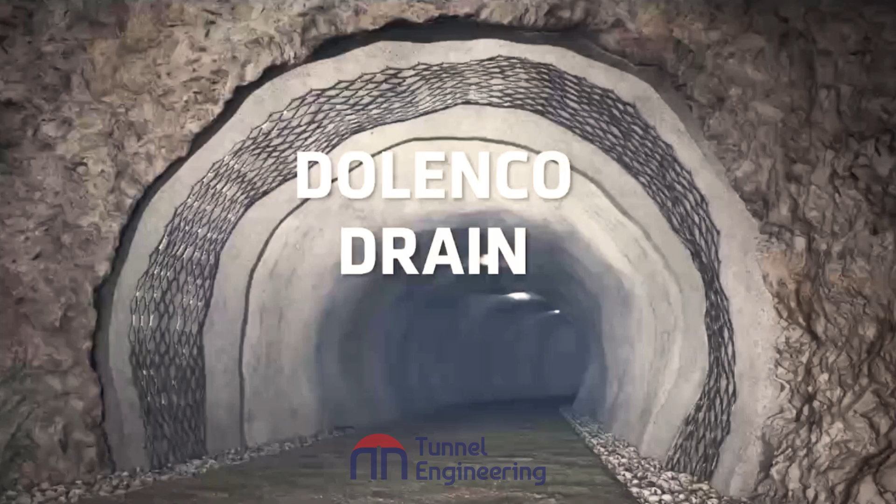Welcome to this talk about groundwater, hydrostatic pressure, and drainage, and how to manage these things when we are talking about underground structures.

When we're doing these incredible feats, digging out a tunnel, meaning removing a huge part of a mountain, for example, and just leaving it void so we can pass through it, there's a number of issues with that, because the mountain is many years old and has its own dynamics. The first we think about is the soil dynamics of doing this, which has a tremendous influence on the structure. We also have the dynamics of the water inside that structure. When we open this up, we apply a number of lining designs to try to use this excavation safely.

We have put this into three times of influence: the excavation, then the construction, and then after. The excavation is very critical because we have no safety at all by excavating, so it's very tedious and dangerous work. During construction, we start with making a primary liner to make sure we can actually go in and work there. Then over the lifetime of the structure, we also have the dynamics of the surrounding soil and rock, whatever it is made of.

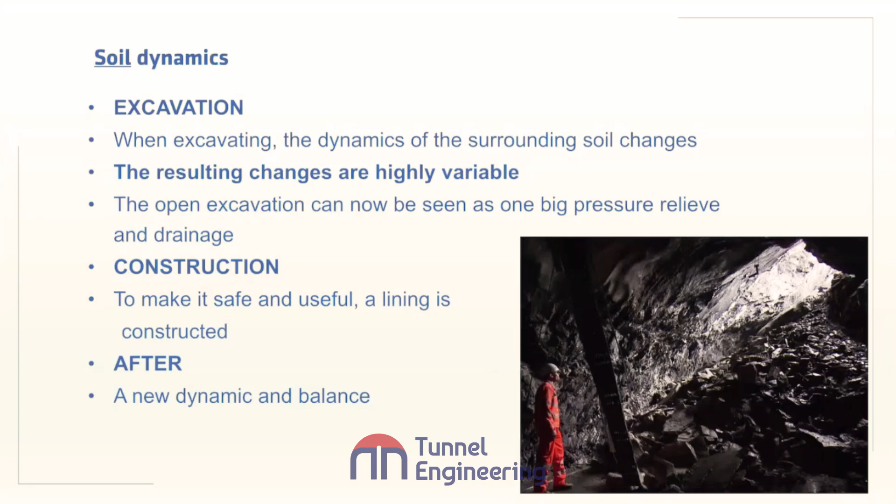The danger here is that this dynamic changes when you excavate, and it can also change over the lifetime of the structure just by settling. The same goes for the water - as soon as we excavate, the water can pour in because there's water nearby. There's a period during excavation and construction where the incoming water lessens, and then the surrounding water starts accumulating again and tries to find a way out during construction. This is where we start having problems with the construction of that specific lining we chose - working with that design is the critical point.

So we have all the aspects covered of what could come and what might be when we do the actual excavation. After we finalize this lining, we have to make it function over the lifetime of the structure. The fewer problems we have over that time, the more optimal the rate of return on investment and the life cycle costs of the structure. Just one closure can be a very expensive feat.

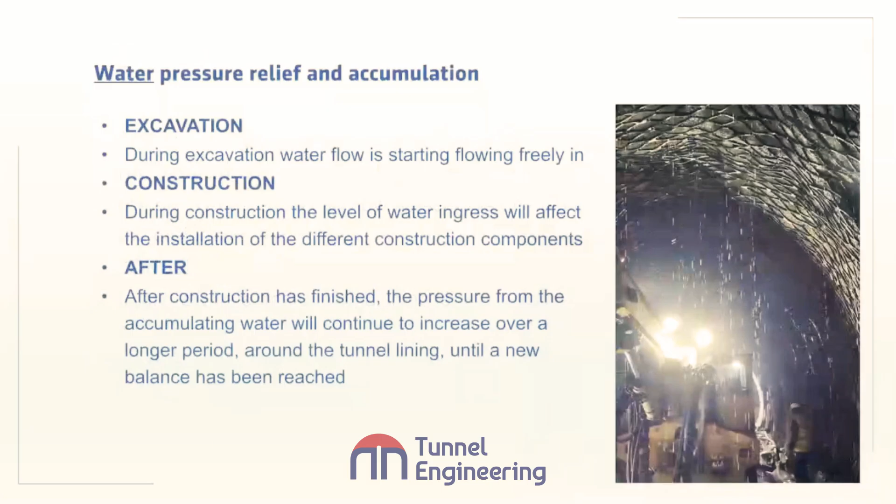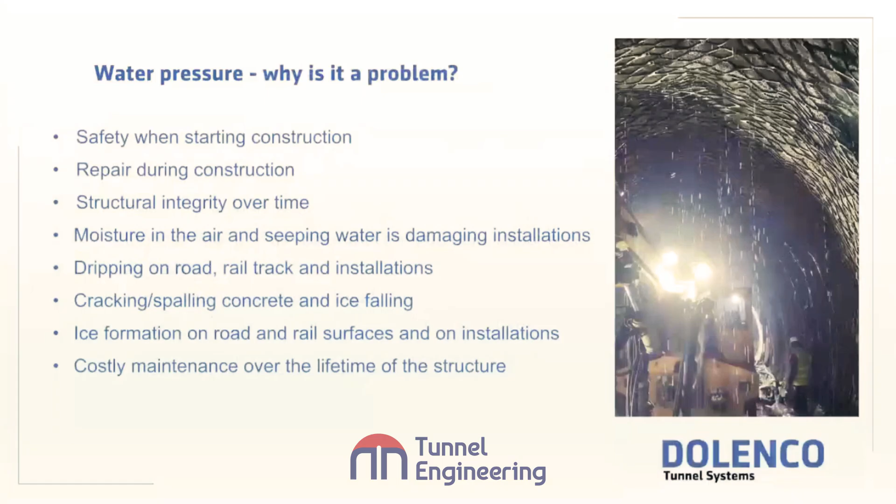These are the critical parts, and what we're looking at is the water and why this is a problem. You all know about these issues because you work with them daily, and it's the nuances it makes when you are making your liner. Water comes in, you may have to repair even during construction. Over the lifetime of the structure you have ice, water coming in, spalling, rails, installations, and so on - these are all very costly feats.

So today we're trying to counter these from three different principles: we try to block it, divert it, or just accept it. These approaches use different tools. For blocking, you can grout it or waterproof it. For diverting, you use line drains and other remedies. Or you just accept that it's seeping, put panels up in front of the seeping, and then you have all the long-term repair issues like injection, concrete repairs, replacing installations, refurbishment, and so on.

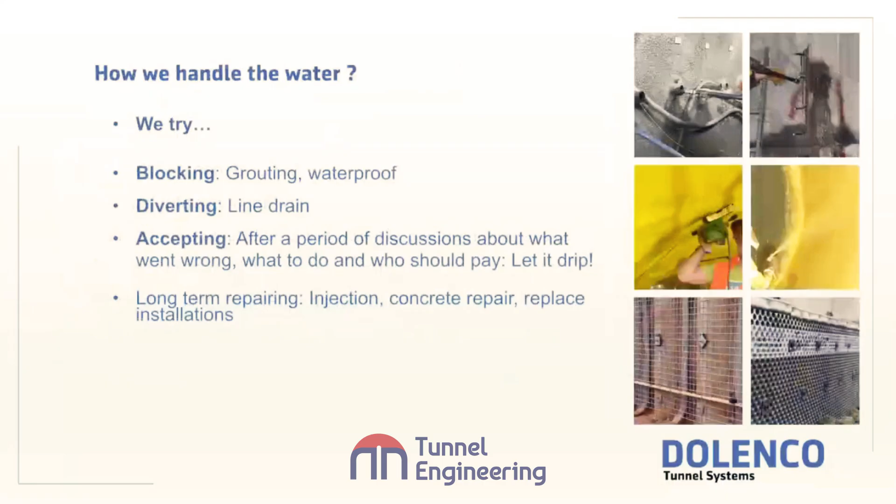Also, we have the design components, the concrete. We can also play a little bit around with these parts, where we can have the concrete fast setting. You can design the concrete with different additives for cracking, or choose to use more concrete. You can use stabilizers like steel girders, anchors, wire meshes.

And for the drainage, you also have different options: dimple sheets, geotextiles, hoses, and so on. So there's a number of parts there as well.

Then finally, we have the waterproofing part, which starts with the grouting, and then we have the different membranes - spray membranes, sheet membranes. You can add fibers to your concrete. You can also use crystalline waterproofing, and you can do the injection, post-injection for the waterproofing.

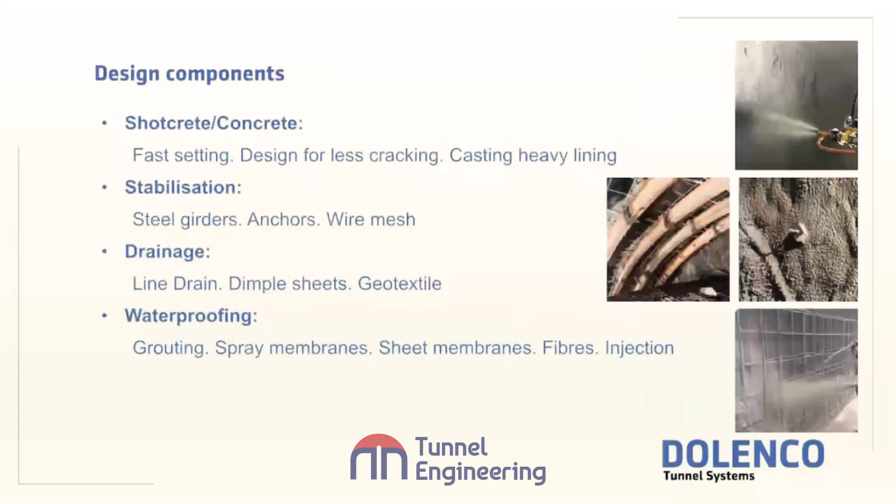All these solutions have one problem in common, and that is that you really never get rid of the hydrostatic pressure, which is the main problem. That's what we have been looking at with our more than 25 years of experience with waterproofing. We basically looked into it and said, okay, if we can manage that hydrostatic pressure, then we can solve a lot of issues in the structure, and maybe even give a longer lifetime, or lower life cycle costs.

And this is how we actually, from this point of view, developed the Dolenco drain for tunnels and other underground structures. What is specific about it is that it will permanently prevent water pressure. And if you take anything with you from here today, it is that - that is the main feature of doing this solution as part of the lining, permanently preventing water pressure.

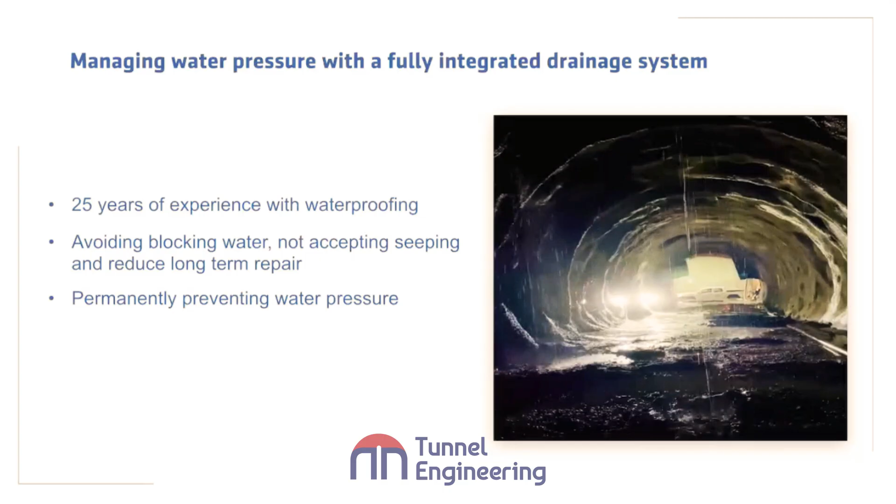As you can see here to the right, this is some of the conditions that we are working with, and which we have also solved with very little remedies, if this is possible.

Before talking more about the specifics, I'd like to give you an illustration with a small video here about the principle of the Dolenco drain. And before I start the video, it's like what you see here.

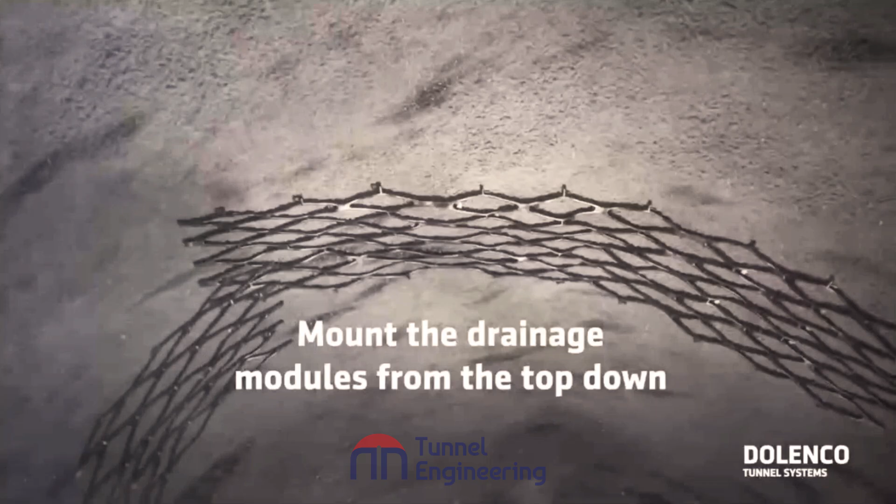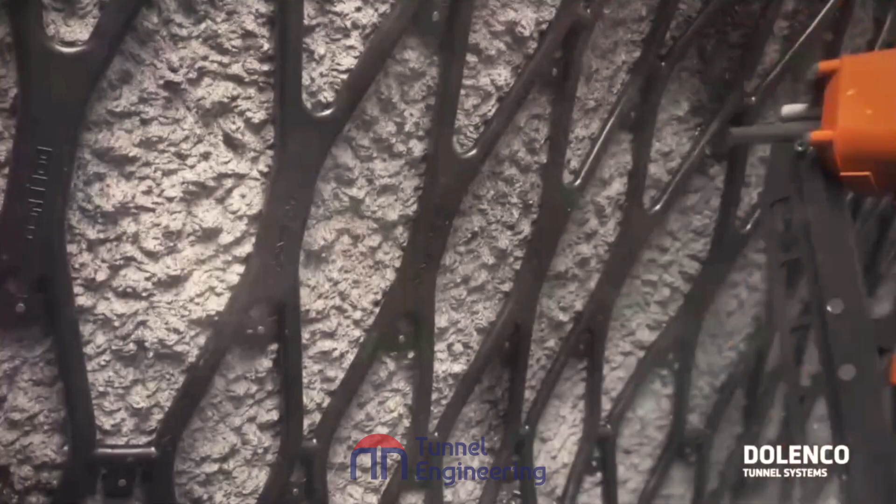As you see here, it's fully embedded into the concrete. You start mounting the modules from the top, and you can see it's a standard module size, overlapping horizontally and vertically, so water can actually disperse sideways and vertically. And at the bottom, some kind of detail for alleviating the water.

So as you saw in the video, it's a module-based system, and these half pipes, you can see them very well embedded in the picture there, down to the left. So it's a very slim structure that you can do, and this of course has some advantages. The module itself is about 1 square meter - that's 80 by 120 centimeters, and only 14 millimeters thick. This, of course, is the advantage of being able to make such a slim structure with a complete drainage inside.

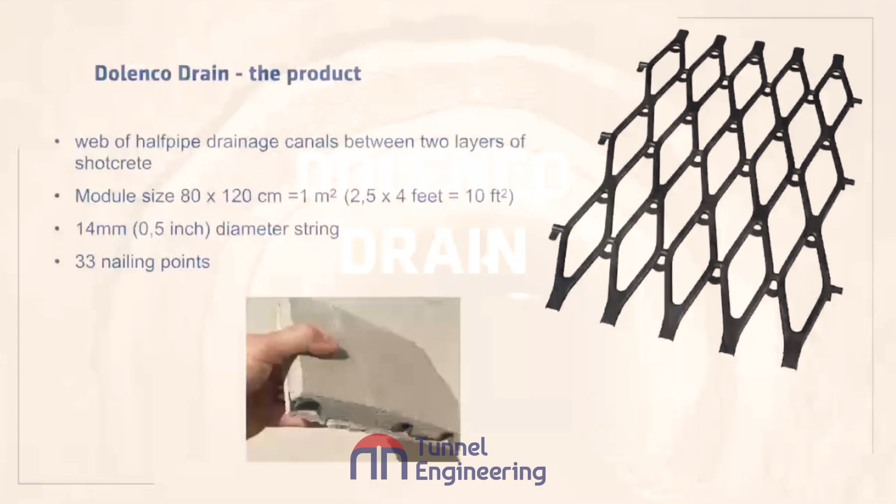More schematically, you can see here the mounting together, and this is also something we can send to you after. To the top left, you see the vertical connection, and you basically just overlap the strings, so the water can go from one module to the next. Below that, you see the horizontal connection, which makes sure that the water not only goes from one string to another, but also from one module to another.

And in those two joints, there's a lot of flexibility built in because of the unevenness of the surface. It's very common that there's an unevenness of the surface, and they have been designed for this purpose. Then there's a designated number of nailing points shown to the right.

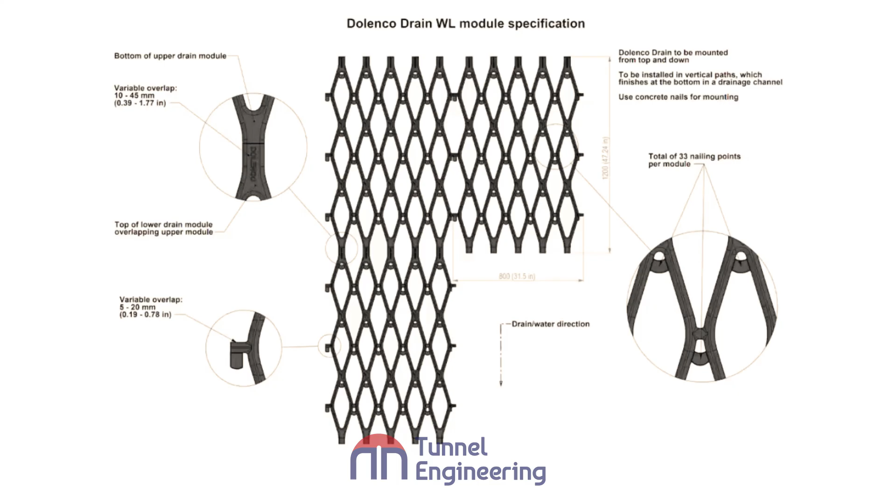So what do you get when you put the Dolenco Drain into the structure? As you can see in the picture, it's covered with a shotcrete layer of about 50 to 100 millimeters and fully embedded, so the primary and secondary concrete now form a permanent lining. This gives you a very strong drainage concept inside, and it can take up to 8 cubic meters of water per linear meter of wall per hour. This is a very high volume of water.

If you have this type of water ingress, you'd have to do something before putting on the second shotcrete layer, because it simply won't be able to adhere to the concrete. Since it's embedded inside the concrete, it doesn't go away - it's a permanent solution. The material is also made to be 100% recyclable.

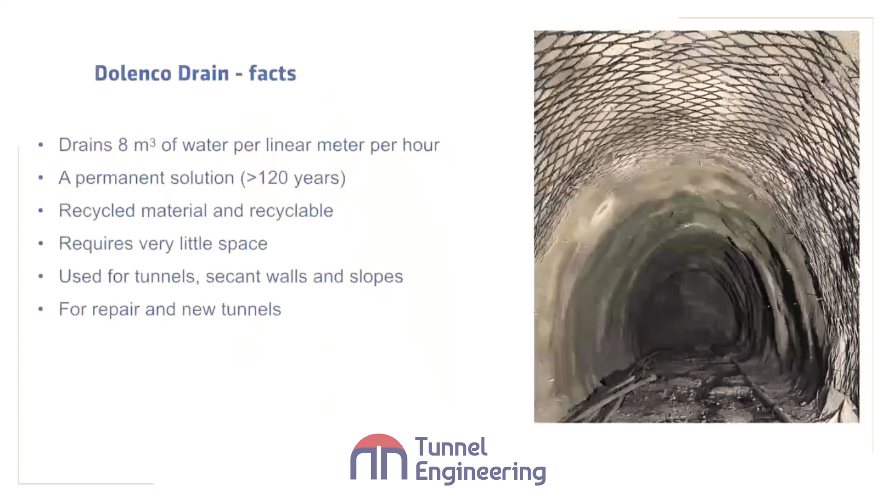Besides tunneling projects, you can also use Dolenco Drain on other structures like secant pile walls, slopes, and other underground structures. And of course, it can be used on both existing and new tunnels. There'll be some examples of this later as well.

So as I mentioned before, the main focus is to permanently prevent water pressure. This also gives you some advantages during construction. For example, if you're using a spray membrane, often we have water accumulating behind the spray membrane before it hardens. When you have installed the Dolenco Drain behind that, it will receive the water before it reaches the spray membrane. So the spray membrane has the opportunity to harden properly and be fully functional. At the same time, you also eliminate or minimize the need for injection during construction.

So let me show you a small video of how it is actually mounted.

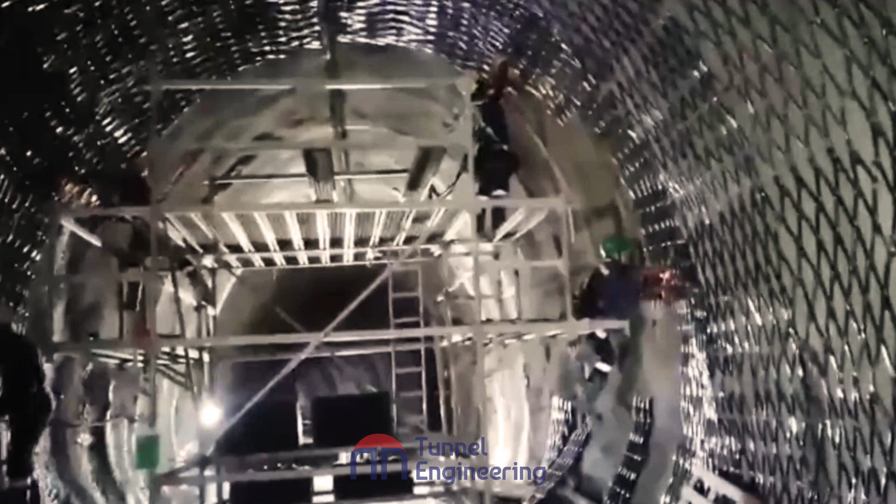Here you see the mounting from a scaffold. It can also be done from a scissor lift. And this is from a road tunnel in Colombia.

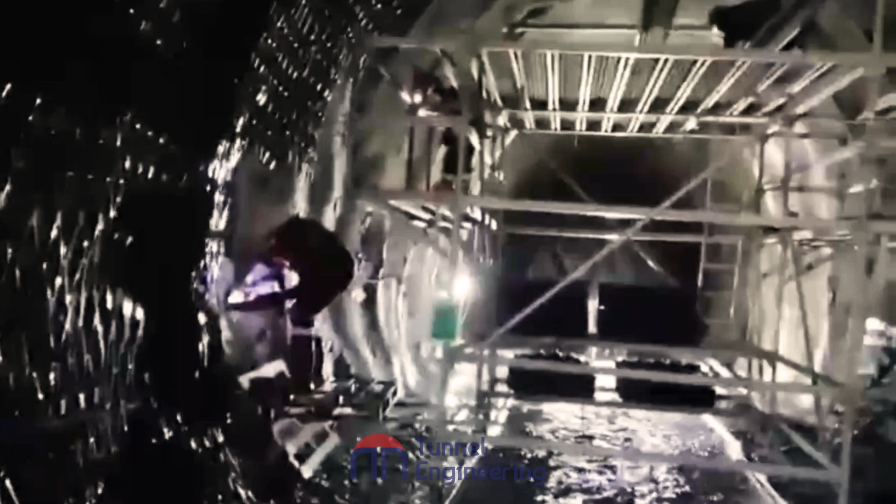Now, as I mentioned, this is a very slim structure. As you can see in the picture, when you've mounted the Dolenco drain onto the wall surface and add the next layer, you get adhesion between the layers. This area is 70% of the surface where you have full adhesion between the two concretes. This is how you make it into a monolithic structure.

So in this case, you will probably be able to calculate less concrete on the secondary lining, because both the primary and secondary linings are now permanent linings.

We tried to compare different situations in hard rock and soft rock tunnels, and we looked at three factors: direct cost, time, and because of that, the derived carbon footprint. In all three factors, we saw a significant reduction in cost, time, and CO2. This is partly because of the reduced concrete use.

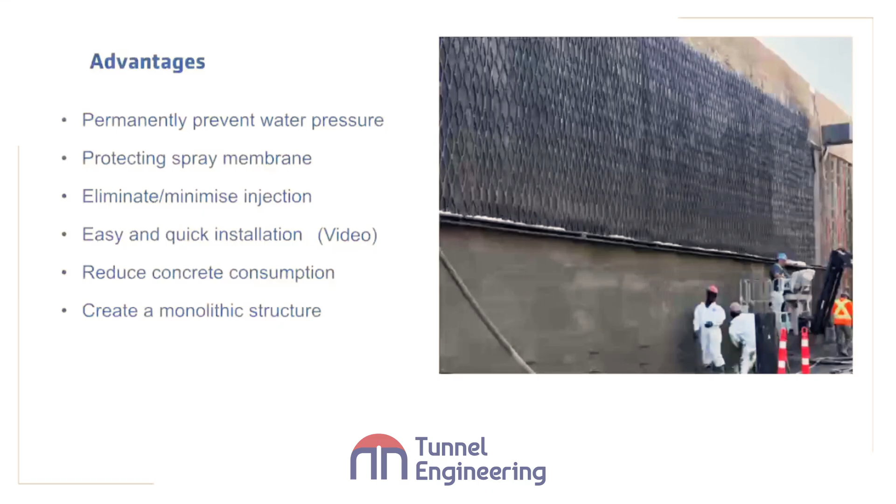It's also because of the fast way of working with Dolenco drain - it's a very lightweight solution. As you can see here on the right, this is a picture from a tunnel in Spain where a scaffold was built over the rail, actually constructed so the train could still run during construction. This illustrates how little space we actually need to mount the Dolenco drain, which is of course the reason it's possible to save time.

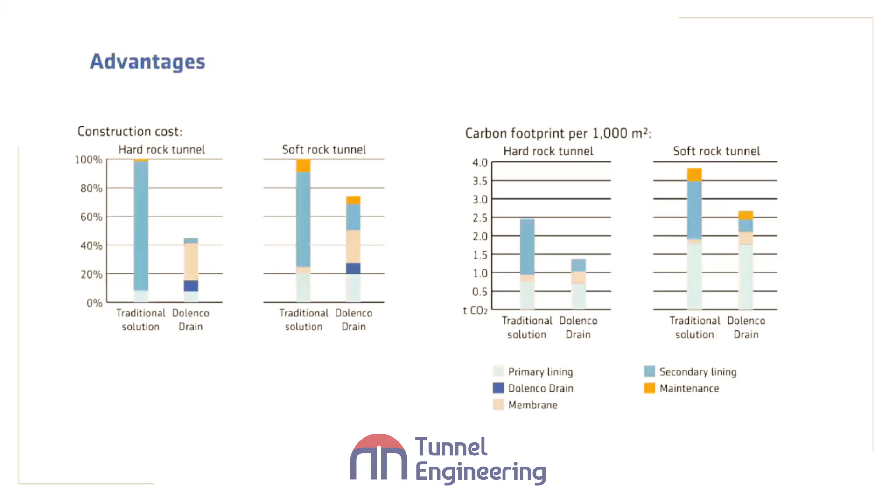And let me show you an example now of a secant pile application.

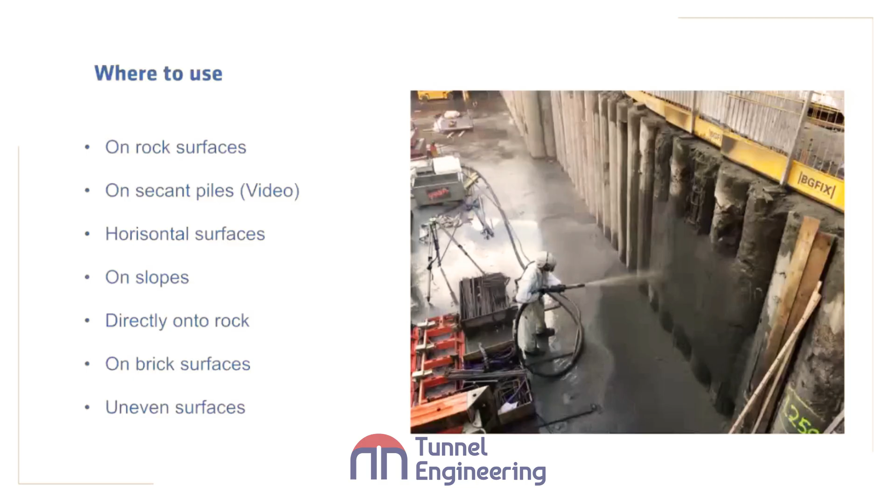Oh. Wait, just a minute.

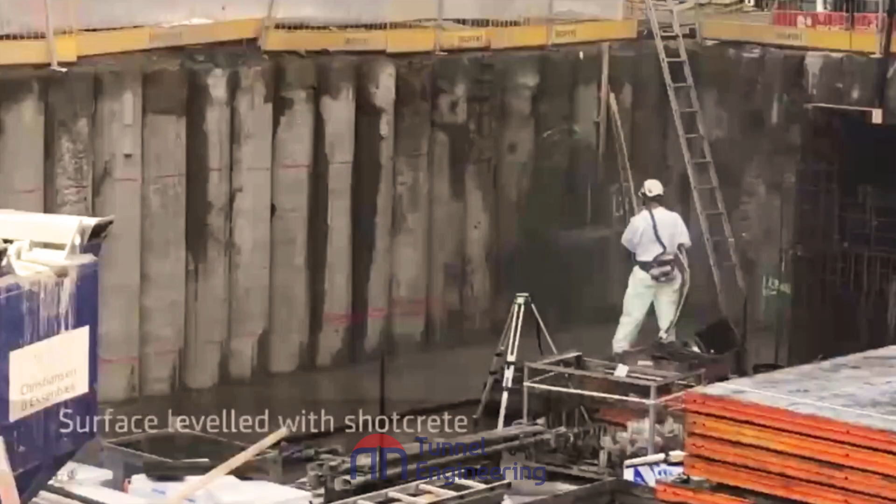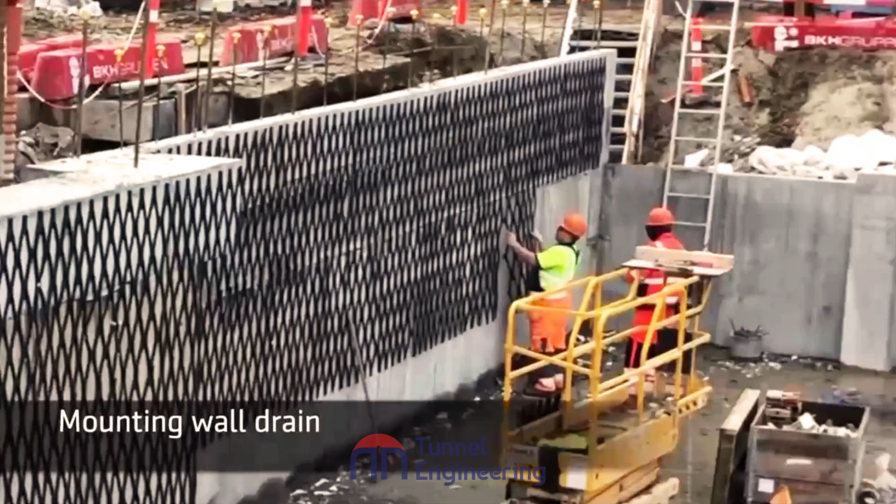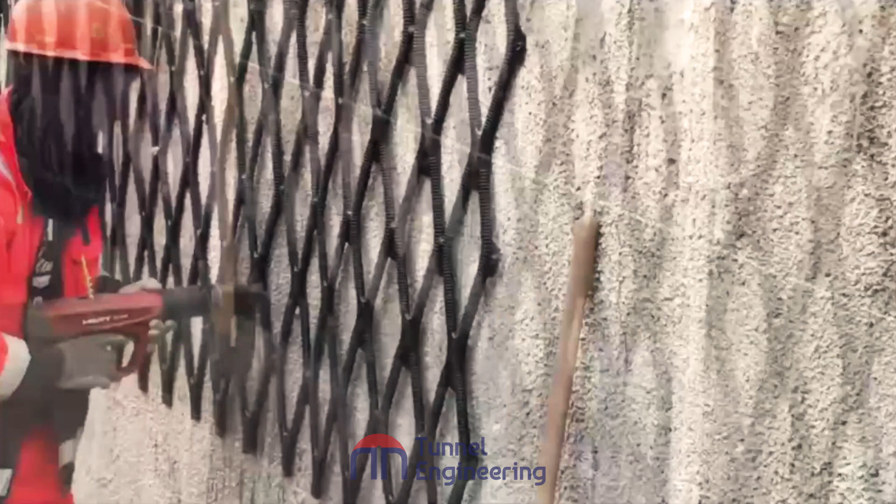What you see here is leveling between the secant piles first, then mounting the Dolenco drain. In this case, it's a combination of wall and floor, where the water simply flows into the wall version and into a pump.

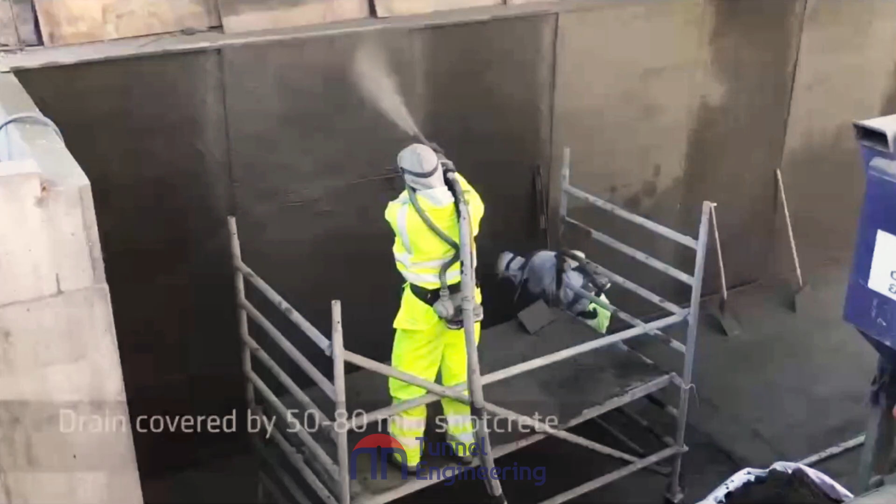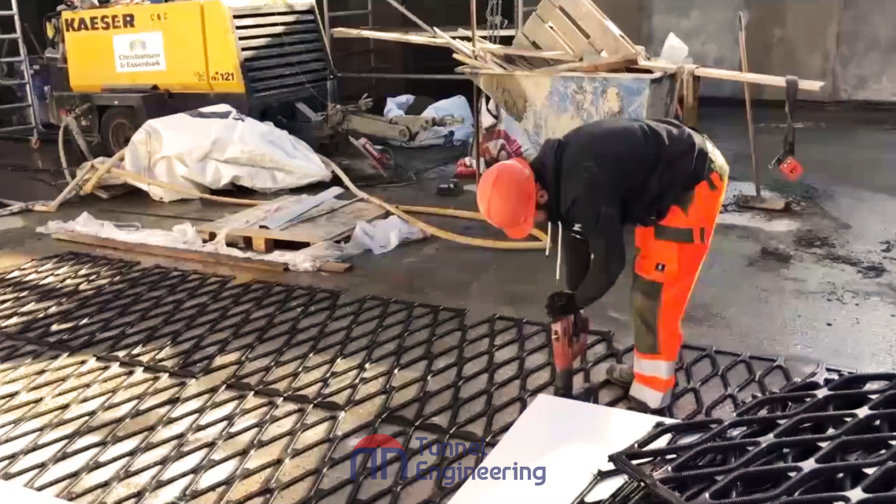It's covered with 50 to 80 millimeter shotcrete. The floor version is a little bit different because it has to take load, so it's a more stiff version.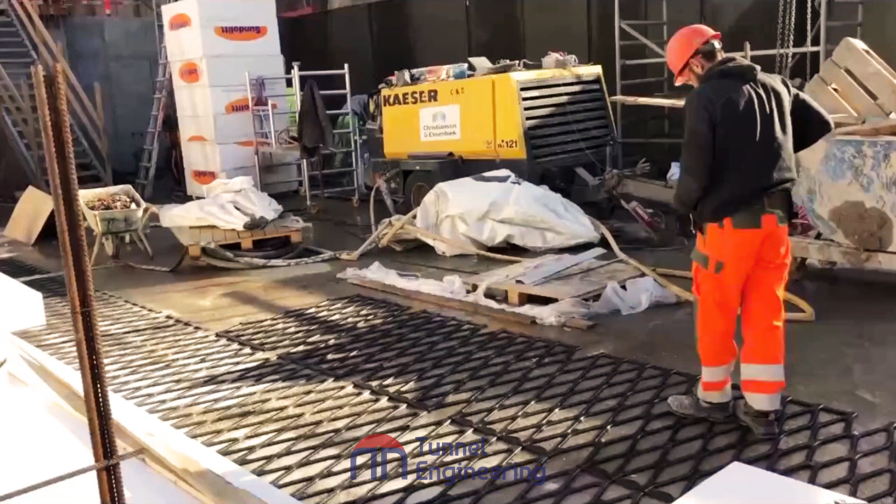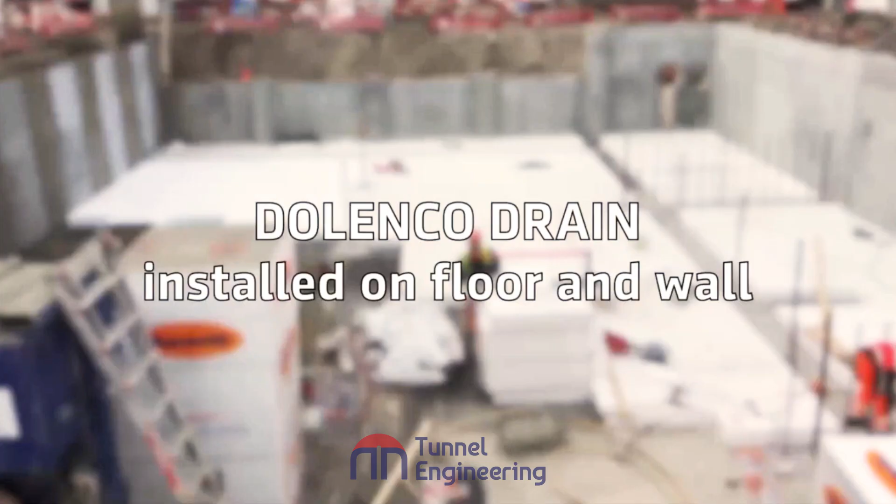As we saw in the video, after having the secant piles, you just fill out between the secant piles, not covering the secant pile with a lot of concrete, just to level it out. It has to be wavy so that the modules can be mounted onto that surface. It doesn't have to be absolutely smooth or flat.

You just mount the drain onto that, and then you cover with shotcrete over that. Then you can combine with different types of gutter solutions at the base. Here we see the Dolenco gutter drain, our own gutter, which is mounted in. This is specifically for very slim structures - a 65 millimeter wide gutter, which can be used specifically also for repair projects where you don't have too much space to work with.

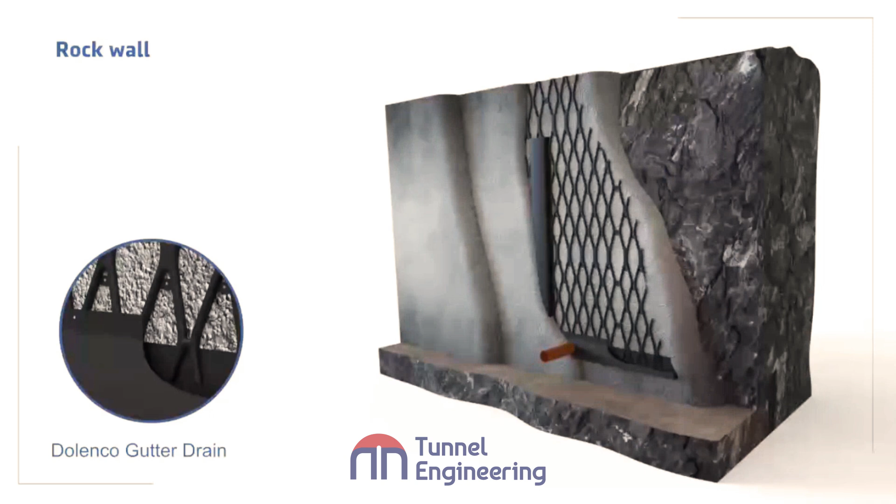On the rock wall, we have the primary shotcrete, the Dolenco drain, and here we'll see it also combined with the vertical line drain. The line drain is for points - if there's a lot of water coming out at a point, it will encapsulate this so we can get the shotcrete to stick to the surface. Then you use the Dolenco drain mounted around that after.

Here it's shown with the 2 layers of shotcrete over Dolenco drain. This is typical that we do this, because if the first layer has some defects, using it in 2 layers will make sure that you have a solid barrier for the water in the secondary layer there.

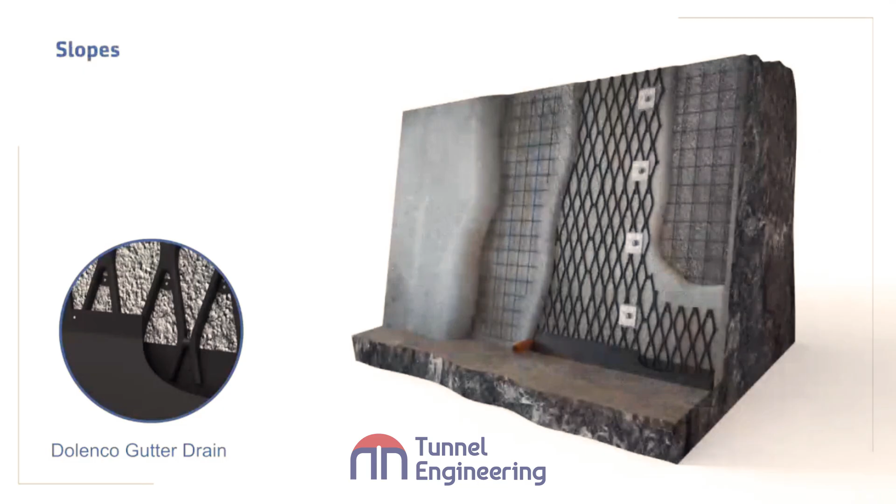Here we have with slopes, where you start with an initial shotcrete layer, then you cast concrete with wire mesh and anchors, and put the Dolenco drain in there. After that, you cast concrete with wire mesh again. And of course, this is instead of using the system where you have a lot of pipes coming through the surface, which has a number of problems for durability over the lifetime of the structure.

In certain conditions, you can use the Dolenco drain straight onto the rock. The issue is, of course, that if the surface is not very smooth, when you shotcrete it, some of the strings will be blocked, but the water will still find a way. The way it's done is to mount it with a wire mesh to hold it onto the surface - you anchor the wire mesh over Dolenco drain, shotcrete it, and the picture to the right is from a project where that made it possible to get the shotcrete to stick to the rock, and it stopped also 80% of the water flow.

The remaining water flow was stopped simply by casting concrete onto this. It makes sense because when you have shotcreted first, and then cast concrete onto that, the water is not trying to get through all that concrete. It will just find a way back into the mesh and alleviate the water pressure that way. Water will always find the easiest way out. So this is a very pragmatic way of working with this situation where you can't get the shotcrete to stick to the rock surface.

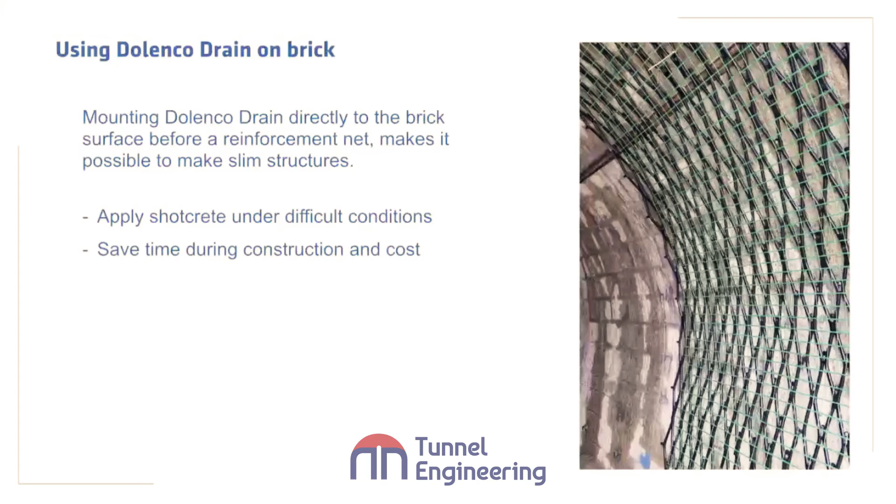On brick surfaces, before you start with the Dolenco drain, you would go and check all the joints and make sure they are repaired and updated. Then you can either mount the Dolenco drain directly onto that, or if it's hard stone, you would put a thin layer of shotcrete or mortar onto the surface, and then mount the Dolenco drain. It could be like here with a fine fiberglass mesh, and then either a render or a shotcrete over this, depending on the preference - typically the contractor decides which method he uses for that.

I mentioned how the uneven surfaces can be done as well, and as you can see here, it's a very, very flexible application. As long as there's no sharp edges, just a wavy surface, it's possible to put the Dolenco drain on that surface. I'll show you a little bit more video here, to illustrate the unevenness of the surface.

Here you also see the nail gun with the battery. You can have two people on a scissor lift like here, and they can mount between 12 and 20 modules or square meters per hour.

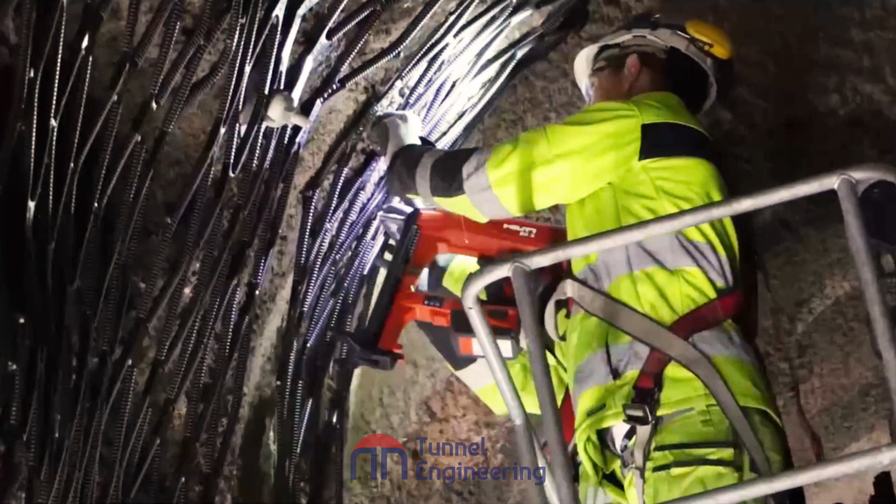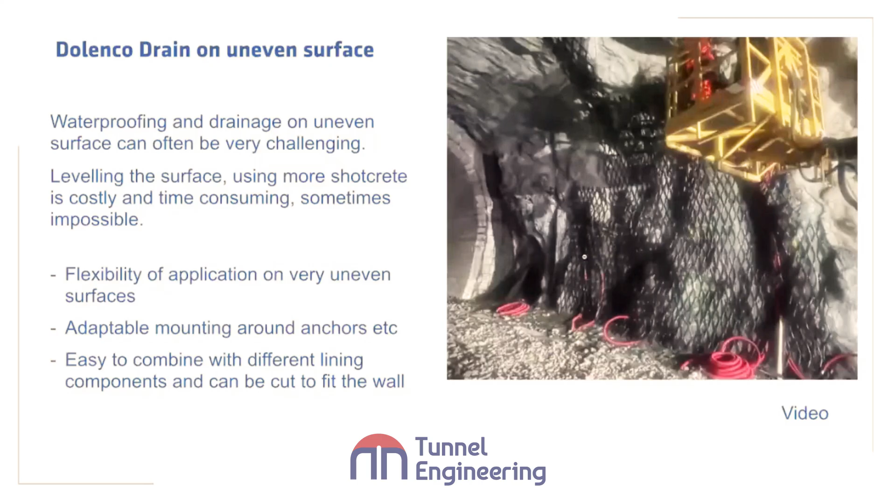The video from the very beginning, where you saw the water running in the tunnel, that was actually managed only by shotcreting over it in 3 layers consecutively, and in between using the rubber hose method. That basically solved all the issues there.

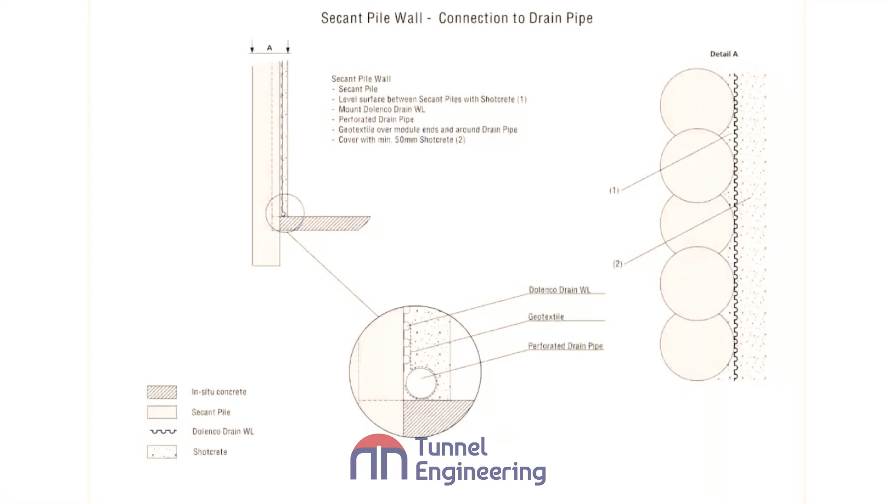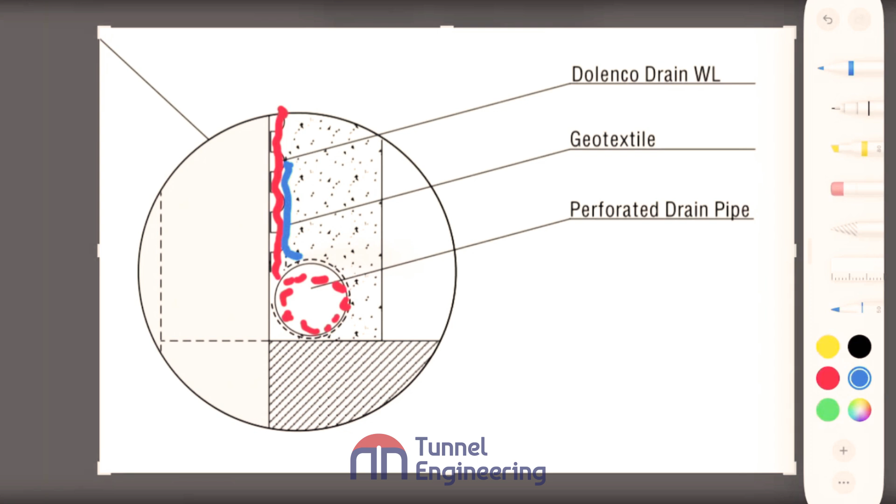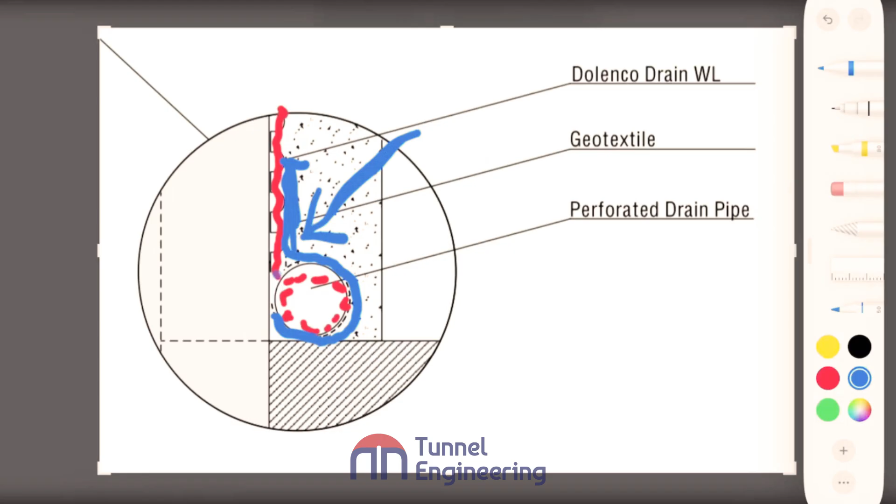Now at the base, in the video, there was a perforated pipe shown, and you've seen our gutter detail as well. There are a number of different possibilities we normally see being done, and one is a perforated pipe at the base, covering the end of the modules. Let me expand this a little bit so you can see better. So you have Dolenco drain modules, water coming down here. You install the perforated pipe, and then you put a strip of geotextile over the end of the module and around the pipe. Just the end of the module, not the whole wall, so that there's no possibility for shotcrete to block the end down here. This is a very common method of doing this.

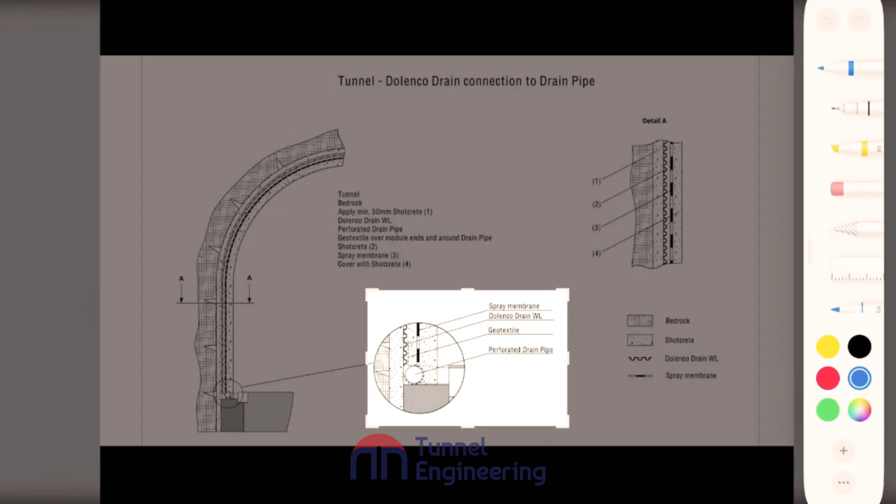Here we have basically the same situation, but this is with a membrane included. So this can be a spray membrane, or it can be a sheet membrane included here.

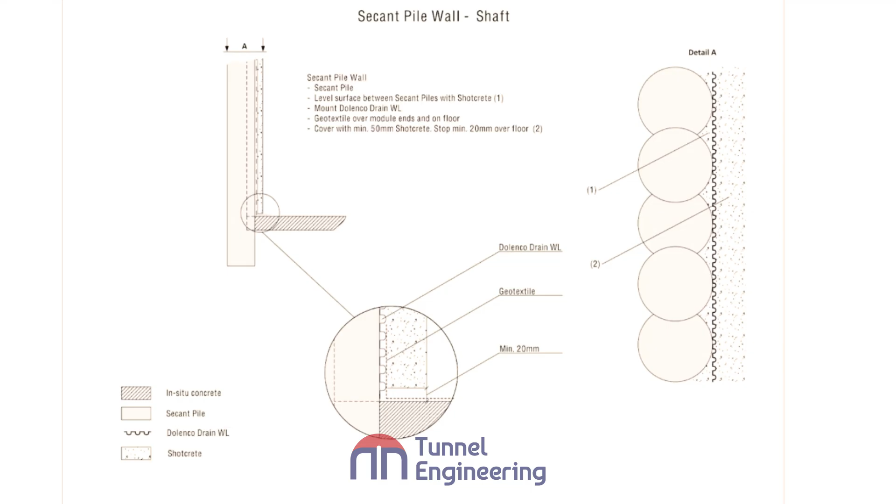Here we have another situation. If you, for example, have a shaft, you could also just let the water run out on top of the slab. So what you do, you basically put again the geotextile strip over the end of the module and shotcrete, leaving an opening at the base so water can come out. Very simple.

And here's a detail from a more detailed shaft, but I only want to show you the detail E here. We do it like this.

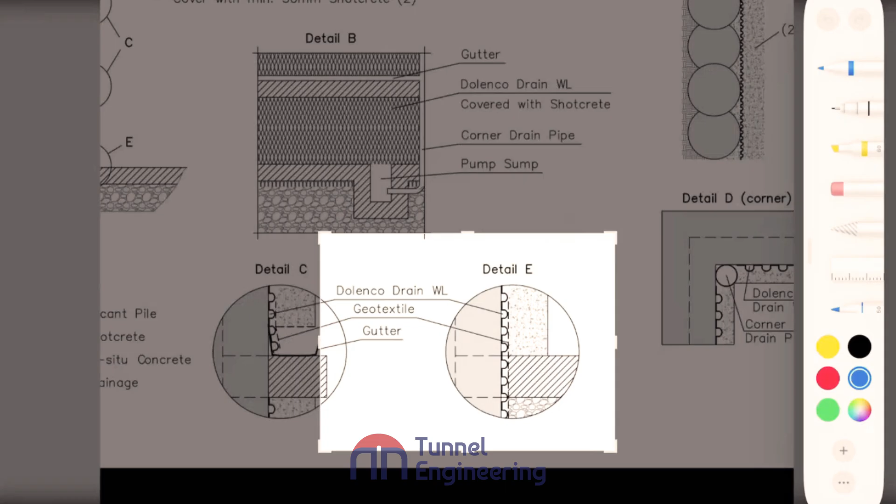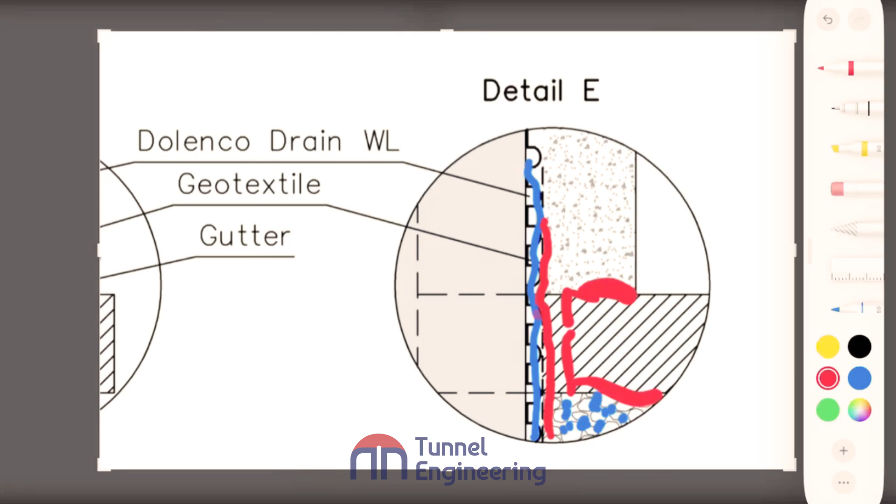And this one illustrates how you can also simply let the Dolenco drain modules pass the slab and lead the water into a stone drain layer beneath the slab. In this case, what you do is you mount a strip of geotextile over the area when you're casting the concrete. Otherwise the cement paste will penetrate into the strings and block them.

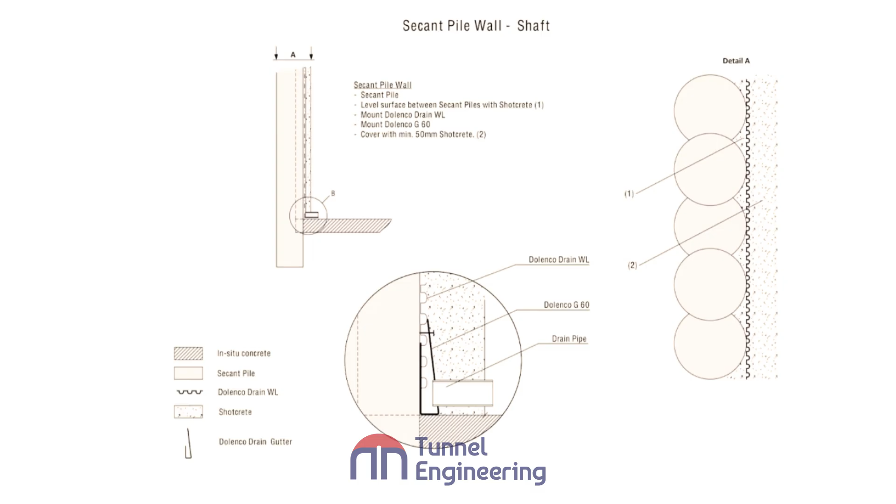And here the last one is the Dolenco gutter drain, which, as I mentioned, has the advantage of being only 60 millimeters. So in that case, it's good for repair work and other situations where there's little space. What you basically do is place the gutter over the end of the modules and nail it to the surface. Then at certain intervals, you mount a horizontal pipe to lead the water out to whatever detail is specified in the project. This is also something we spend quite a lot of time on, discussing these details when there is an individual project. So we have team meetings to discuss how to optimize the use of Dolenco drain in these situations.

So how has it been used? I've included a number of different types of applications here to give an illustration of this. And the first one here is from a road tunnel in Switzerland.

The road tunnel actually collapsed, and there was a problem, of course, first to rebuild the structure. Then there was very little space to do any work inside the tunnel after that. For that reason, they chose simply to mount the Dolenco drain on the surfaces and just cover it with a shotcrete layer, a very slim layer of shotcrete. I think it was 50 millimeters, and that worked perfectly.

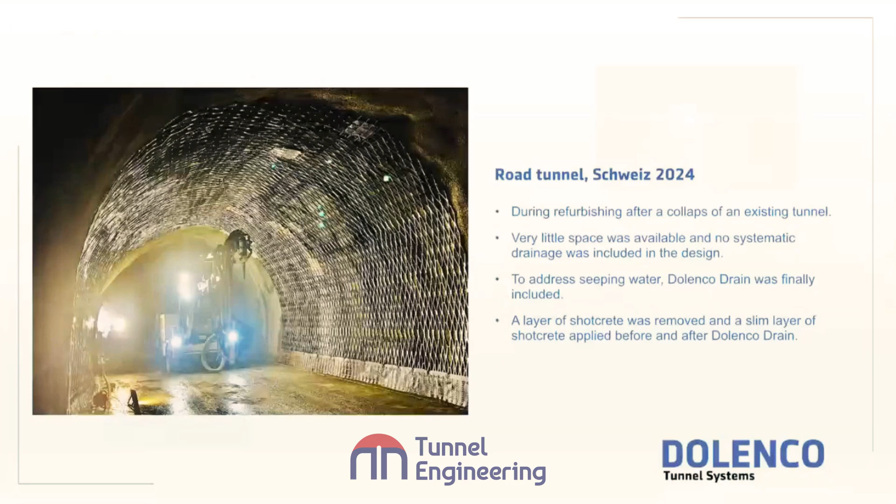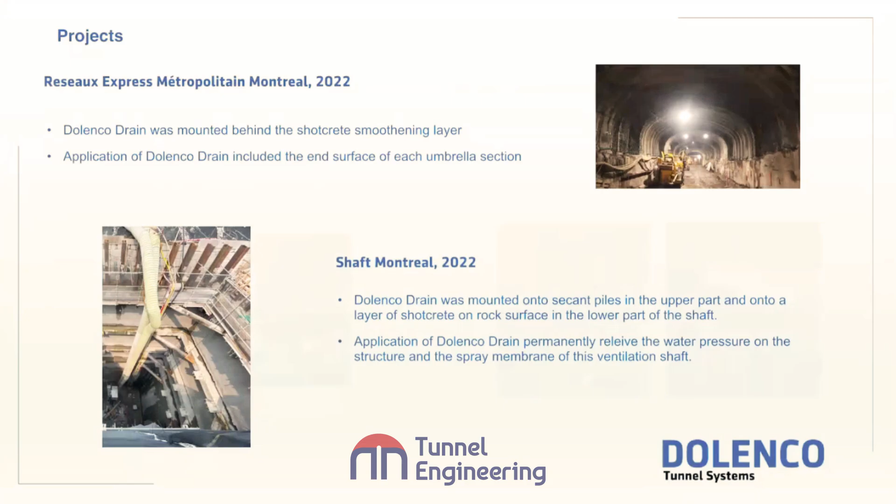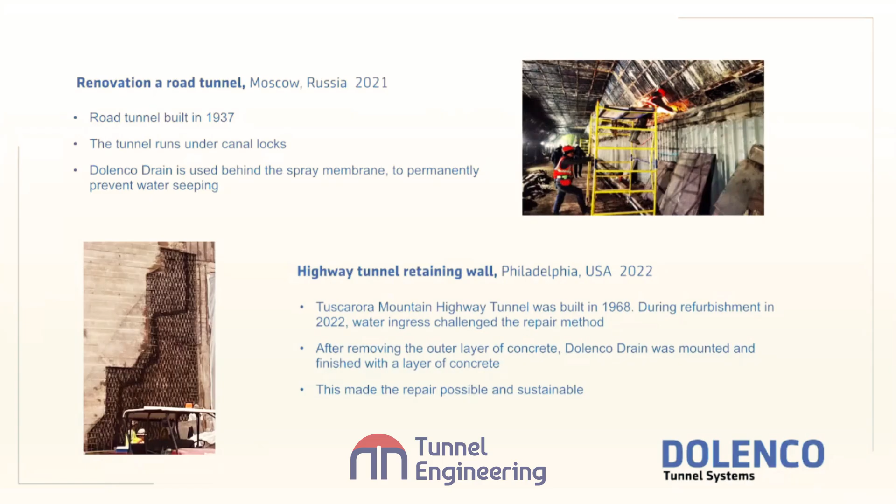Below that, an example of a retaining wall where there was no other option than to remove the outer layer of concrete, put the Dolenco Drain in, and then apply a layer of concrete over that again. This one is in Philadelphia, we saw the other one in Moscow.

Here we have a project from Mumbai where they changed the design from a sheet membrane double lining to a shotcrete lining. In parts of it they used Dolenco Drain and also other types of water drainage system. What you see on the picture to the right, next to Dolenco Drain, is not our product, it's a line drain. So different types of products were used there because the shotcrete and spray membrane doesn't have a drain behind it. When they changed from the sheet with a drain behind it, they also included this in the new design.

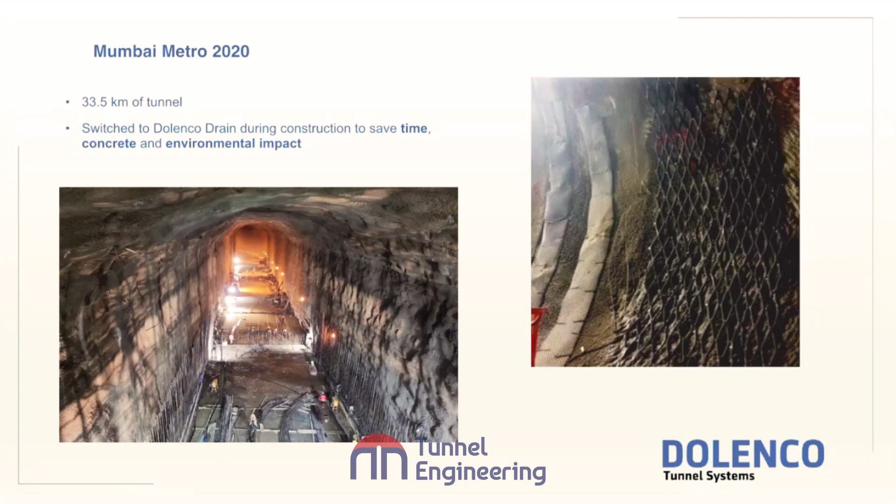And here we see an underground railway station, plus the ramps with secant piles. You can kind of see on the picture the secant pile contours. It was leveled out between them as specified, and then put on the Dolenco Drain. Here it's with shotcrete, spray membrane, and shotcrete again.

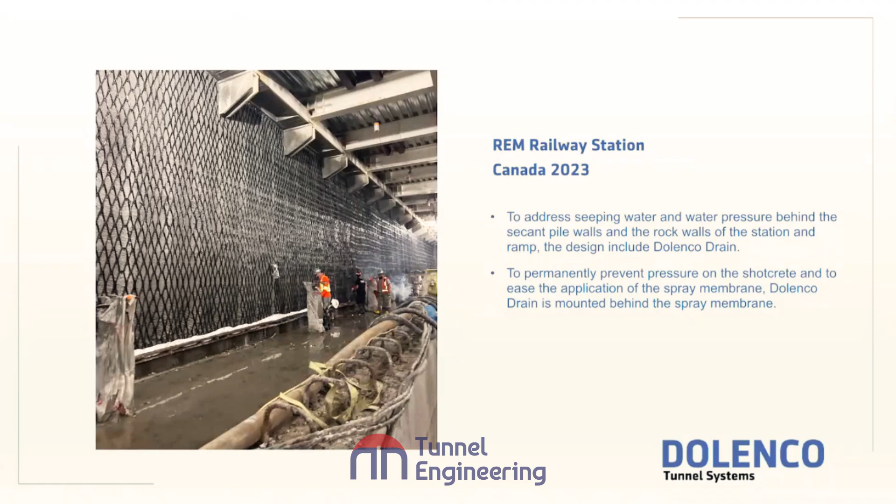Okay, excellent, Johnny, I would say that was an excellent presentation. Thank you very much, it was really good. It was interesting to find out how your system works.

So we have several questions in the chat, some very good questions. To me, the best part is when you explained the benefit of this method, just to reduce the hydrostatic pressure. When we use other techniques, we may stop the water or control it, but actually the water is still there, and that additional force on the lining or shotcrete requires extra work to ensure we have enough concrete or shotcrete to resist that hydrostatic pressure. So that's a great benefit I can see in this method - instead of keeping the water there, you divert it and reduce that hydrostatic pressure, which can result in reducing the concrete.

Because I was looking at the chat, there were some very good questions - how can we reduce the concrete? I leave it to you to answer, but to me, if you can divert the water, potentially go back to the designer and exclude the water from behind the concrete, you might be able to optimize your design and reduce the concrete. So, yeah, I don't want to answer the questions in the chat myself, I leave it to you.